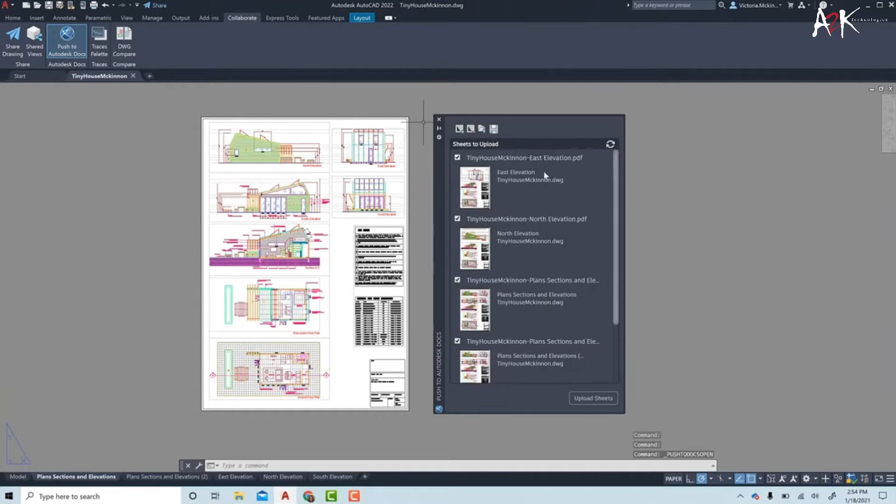For decades, AutoCAD has served you and your team well. And as the software has gotten better over time, so have you. So why would you consider a change? Let's take a look at the top 5 reasons AutoCAD users upgrade to Inventor and the Product Design and Manufacturing Collection.

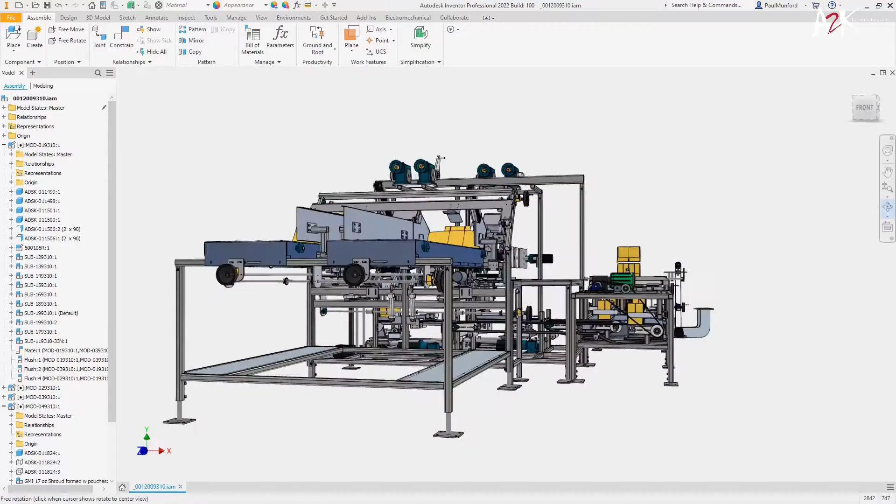At number 1, you can make your design process agile. Parametric 3D modeling allows for intent and relationships to be created between geometric features, leading to a significant reduction in time spent incorporating design changes. A single parameter can cascade geometric updates throughout the model.

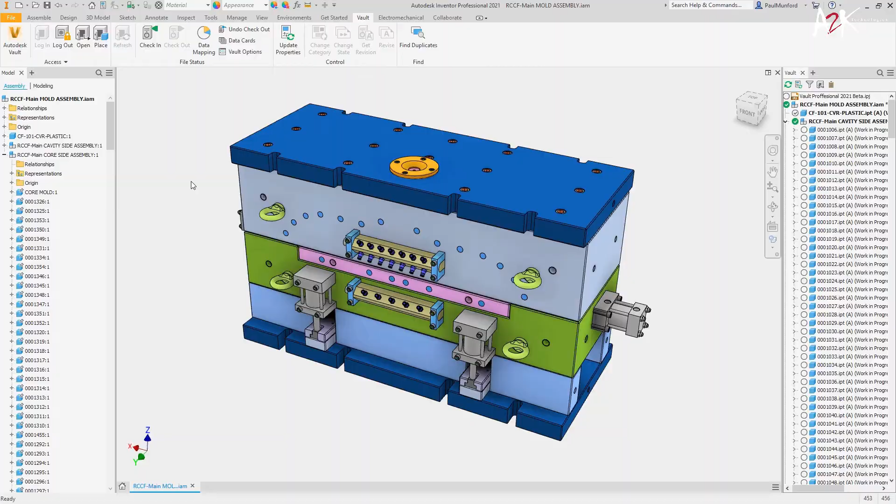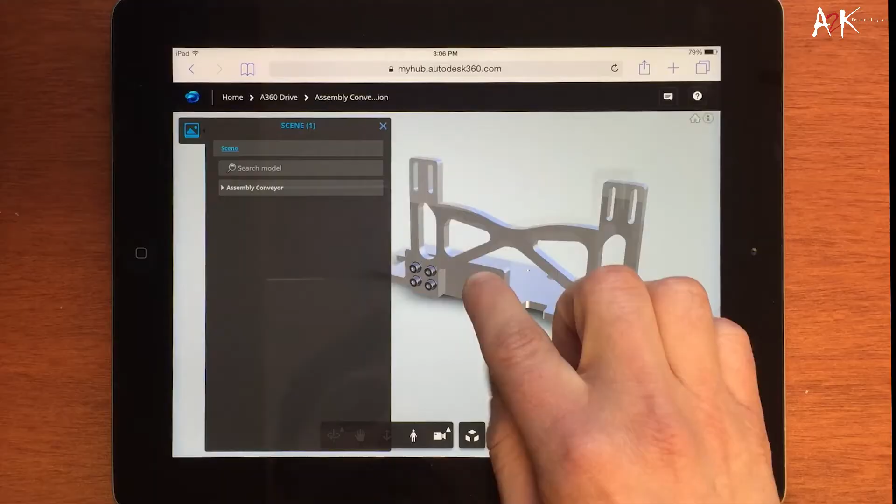At number 2, you can better communicate your design with 3D. 3D models provide a clearer understanding of what is happening in your design, so issues and opportunities for improvement that are difficult to discern in 2D become more readily apparent. In addition, 3D models can be used to generate high-fidelity renderings and animations, so you can show off your product to the world with stunning visualizations.

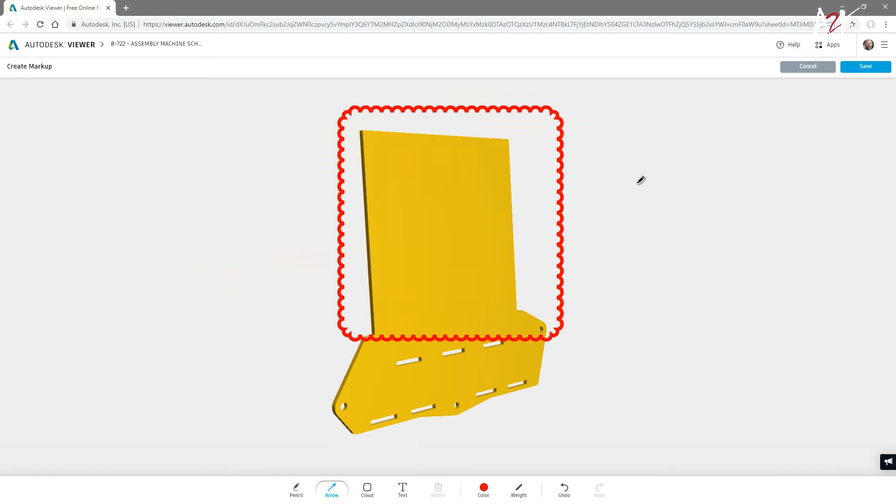At number 3, you can automate product configuration. With the addition of parameters, rules can be defined that automatically configure products to customer specification. This not only reduces engineering time spent on configuration, so they're free to work on other valuable projects, but your sales team can be equipped with the configurator to more rapidly respond to RFPs.

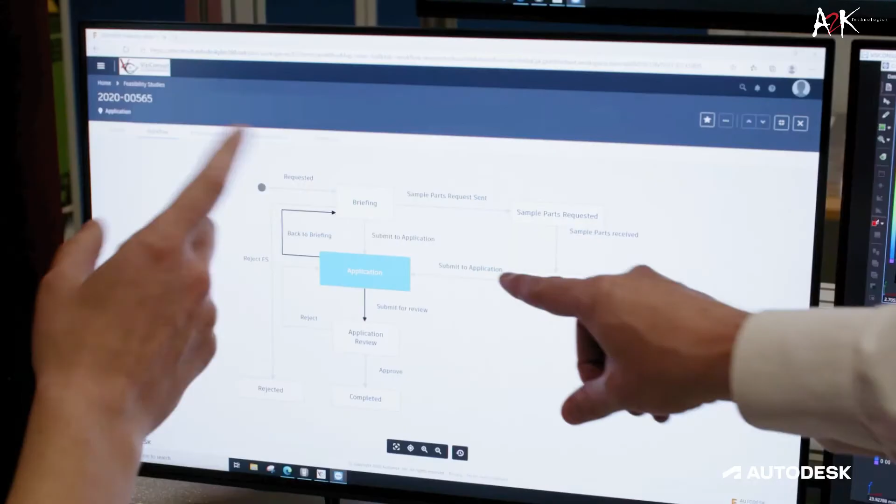At number 4, you can streamline the transition from design to manufacturing. When working with 3D parametric modeling, manufacturing deliverables can be generated automatically and updated anytime the model is changed. BOMs are derived from the 3D CAD model and can be version managed. CAM software can rapidly produce CNC toolpaths.

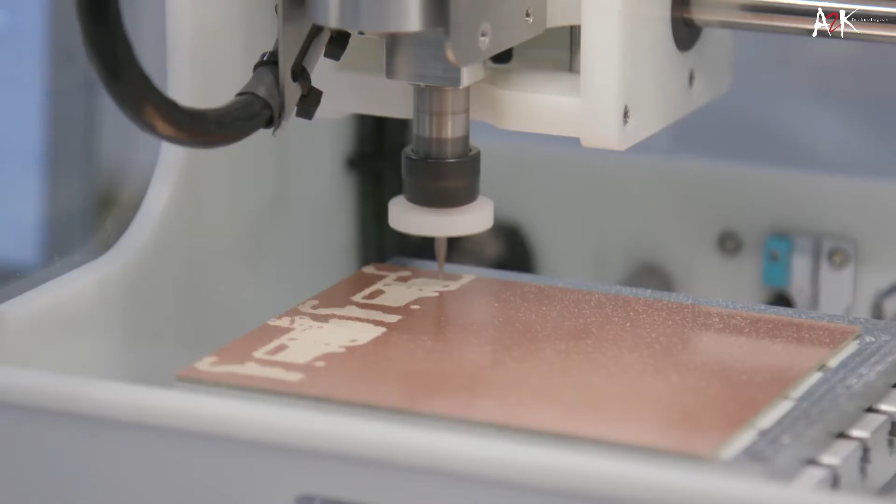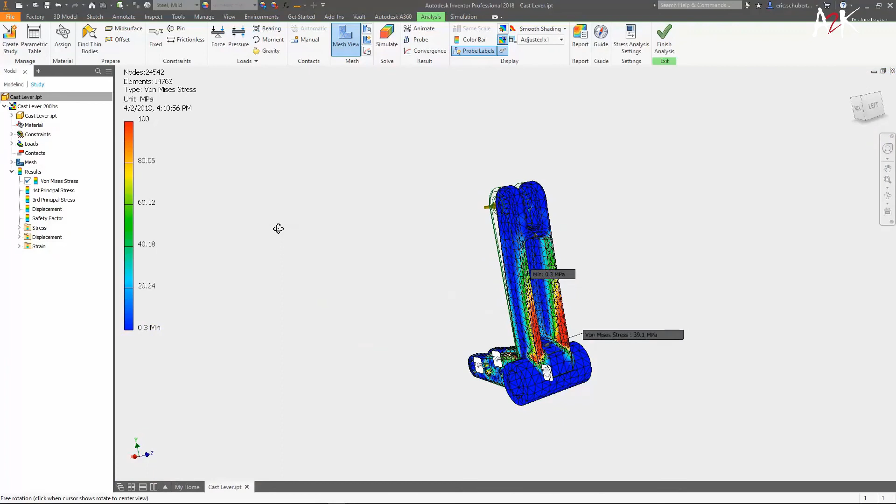At number 5, you can test and analyze designs early. Using simulation tools integrated into the modeling environment provide the opportunity to test and analyze designs early and throughout the development process. From tolerance stackups to stress and thermal analysis, you can get immediate feedback on your design decisions with the ability to easily modify the model to incorporate design enhancements.